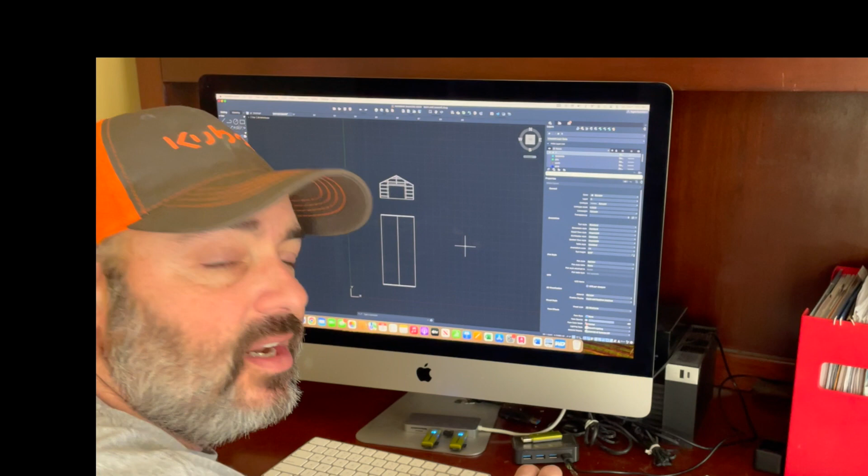I got several things going all at once, but this one has taken a bunch of my time, just going back and forth, making sure I've got everything how I want it. This is the barn project, and if you watched one of the last videos...

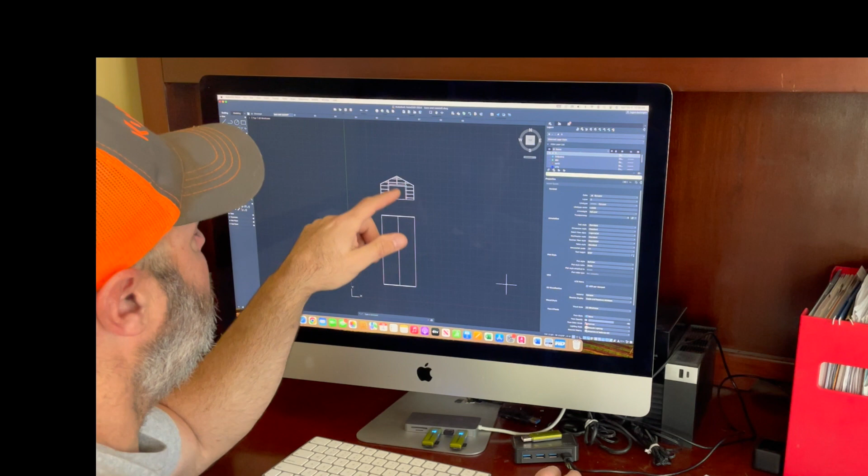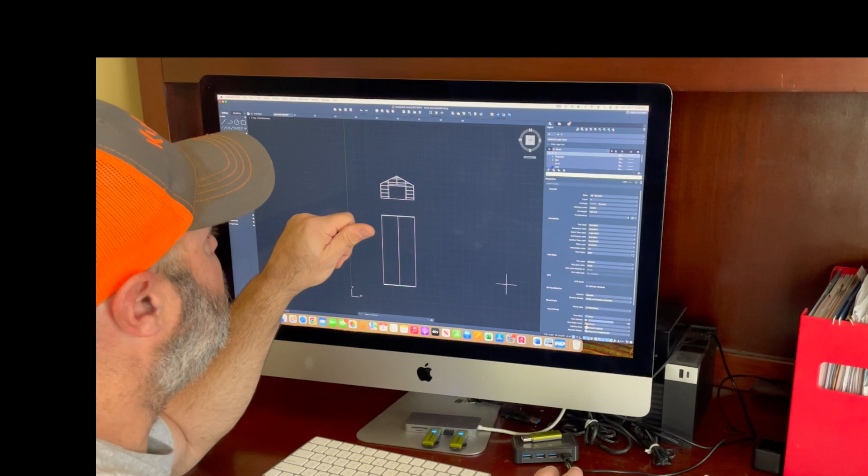This is the plan view, looking down from the top, and this is the very front of it, looking from the front. If you watched the last video, might have been two videos ago, I can't remember, but I moved the sawmill. The sawmill was in here, and this framing is all planned, not in place right now, but the sawmill was sitting in here, and I wanted to open this up for some storage and to use it for what it's intended for.

I just put the sawmill in there temporarily. So this is my plan moving forward, and I can bring these layers on and show you kind of what it's going to look like.

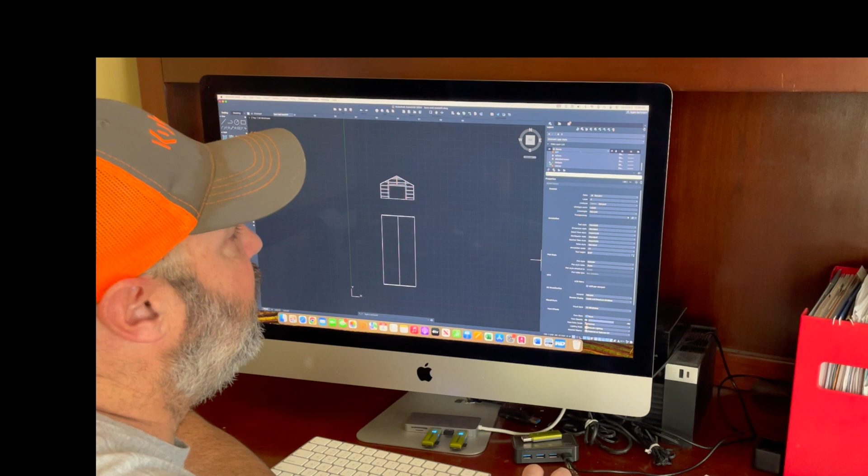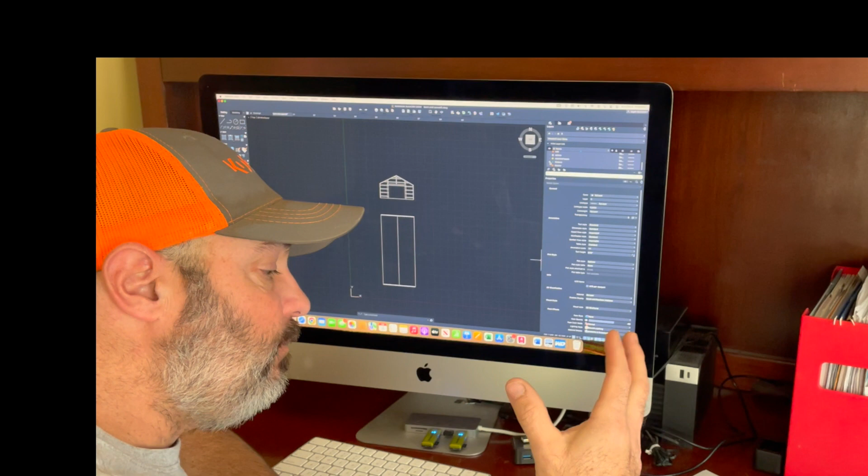I've got all the dimensions and everything, so I've done little engineering calculations. I'm not going to bore you with all that, but I did some of those to figure out the height of the LVL beams that I'll need to span 25 feet. So I had to calculate the total weight of the roof plus the snow load, and figure out the length of the span to get the height of the beam that I'm going to need. So basically a lot of stuff went into it.

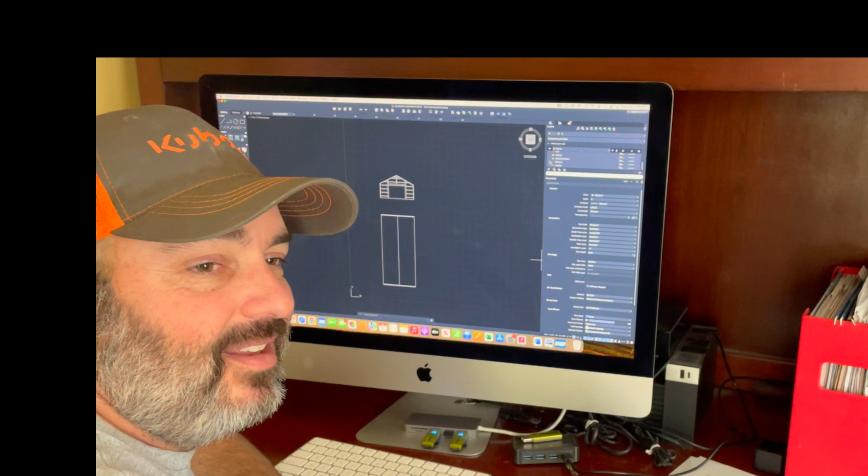There's some other YouTube videos that go into detail on that, but I kind of had to cheat and watch some of those, and once I got into it and got started, it kind of brought back my engineering training from the 90s. So it's been, I don't know, 25 plus years.

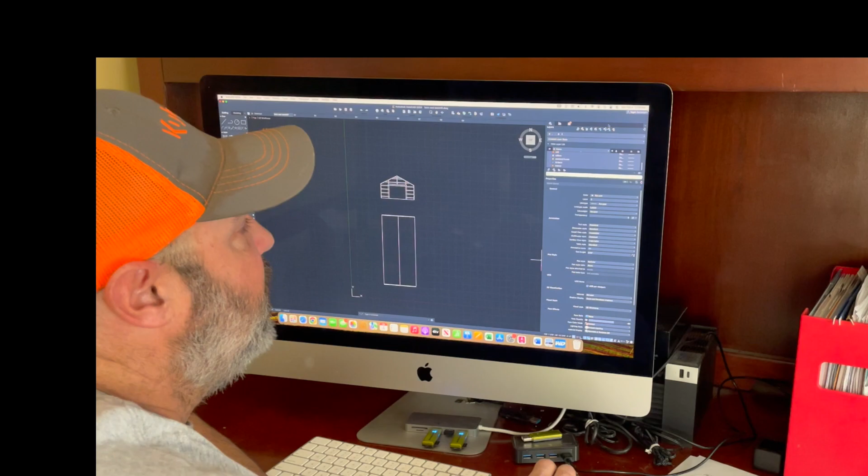So anyhow, let's bring these layers in and I'll show you kind of what it's going to look like. First thing we did, we came in here and we plopped in some, let me bring this in here. These are the timbers that are in the ground, the telephone poles. So this will make it look a little bit better. Okay, so right now we have these...

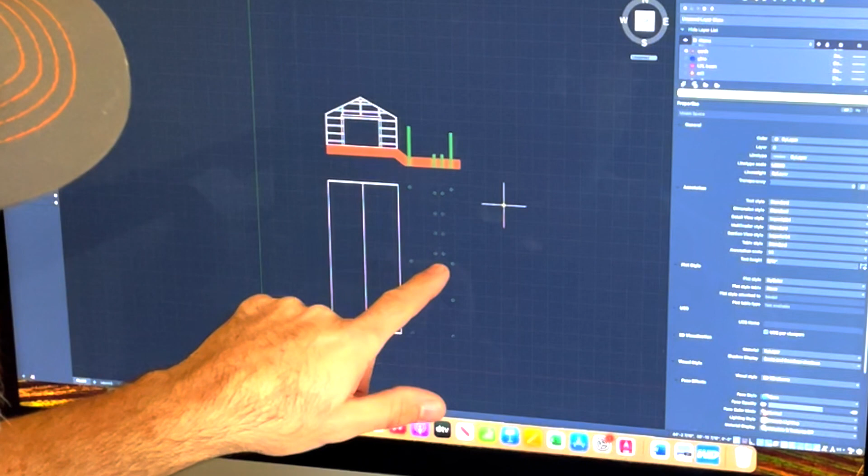...in with the sawmill sitting on it. So that's all these here. Again, this is the plan looking down from top, and there's the sawmill sitting in there like that. This is as built, so this is real dimensions. I've got elevations and everything that are proper on here.

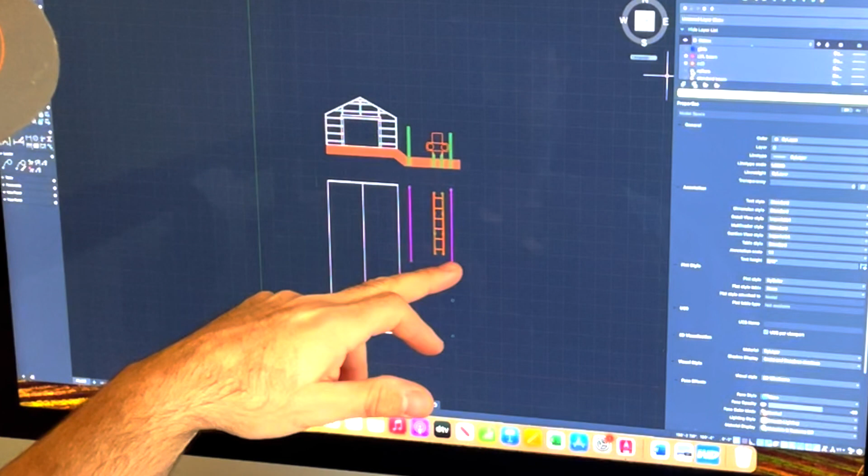So the next thing we are going to put in here are our LVL beams, which are the 25-foot span. Those go right there. I'm going to put one here and one here. A lot of people are going to ask, well, why don't you just span from here back to the building? And I could do that if I wanted to cut some 20-plus foot long pieces.

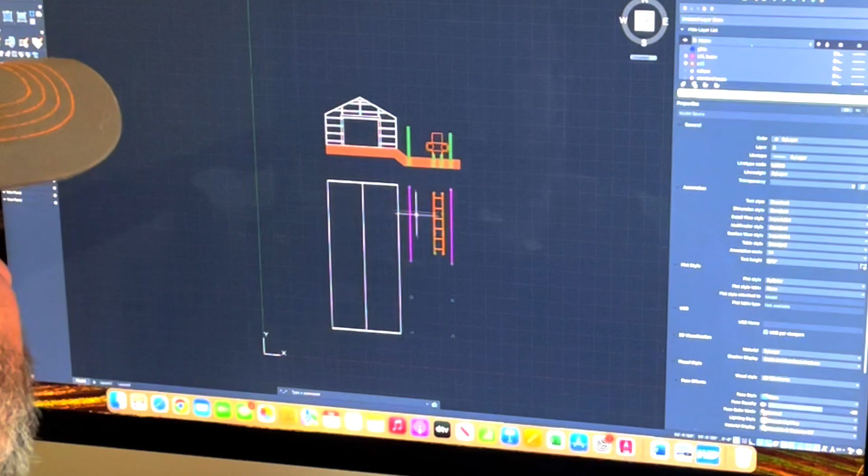But I put this sawmill out here intentionally so that I could drive my tractor in between here. My tractor has a stance of about 6 feet wide, so I had to take that into account. In doing that, I'm going to have a pretty good span here, and I'll bring the dimensions in a minute and we'll see exactly what it is.

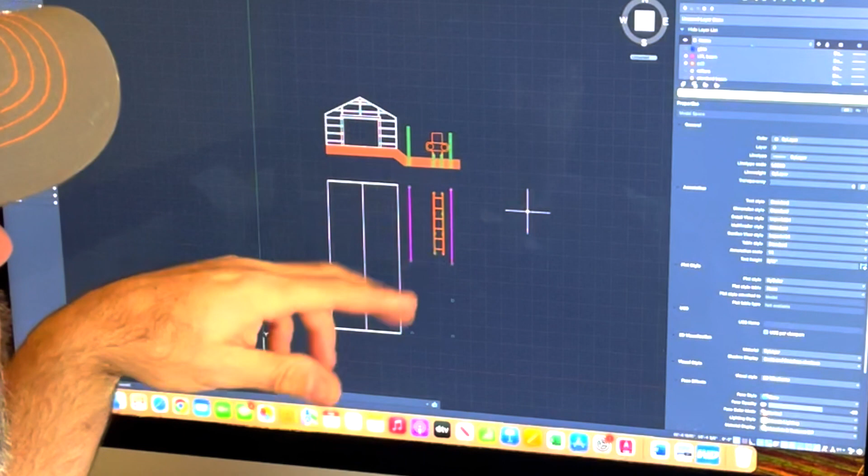Yeah, so I'll be able to drive my tractor through here and get all the sawdust out. And the next question a lot of people are probably going to wonder is, well, why don't you just throw the sawdust outside? And I could do that, but the way this sawmill is set up, the stops are on this side over here on the left side. So when you load your logs, you want to load them against the stop so they don't roll off. And the way it is, it's going to shoot the sawdust into here.

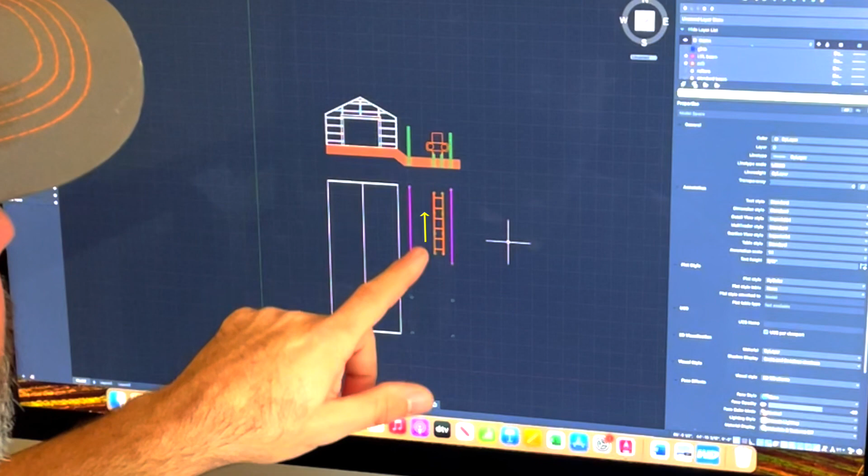So the travel of the mill is going to be this way, shooting the sawdust towards the building, which is not a big deal because I made it wide enough where I can bring my tractor through with the front bucket or the box blade and just scoop it all out in one shot and be done with it.

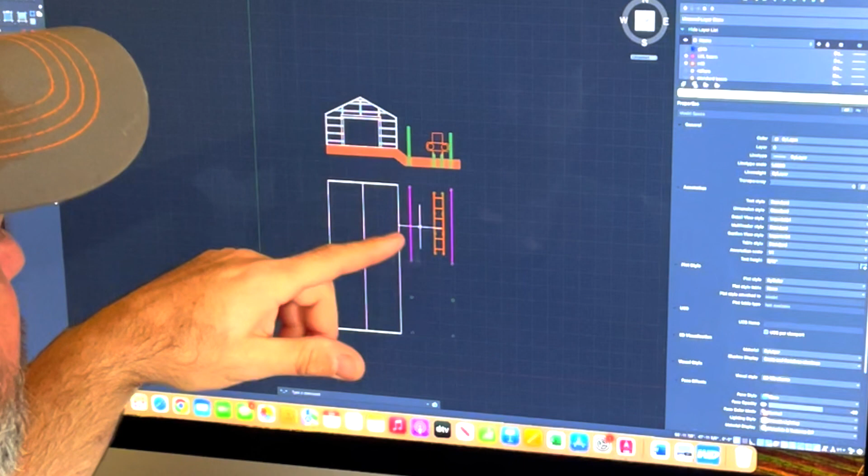I could have turned it around, but then I would have had to makeshift some stops for the other side, and I didn't want to get into all that. It's not a big deal. I wanted it wide enough so I could store some stuff in there, so I could turn around and put lumber, take lumber off the mill and put it over here on sawhorses if I needed to. So I kind of wanted it that wide. So anyway, with that being said, I'm...

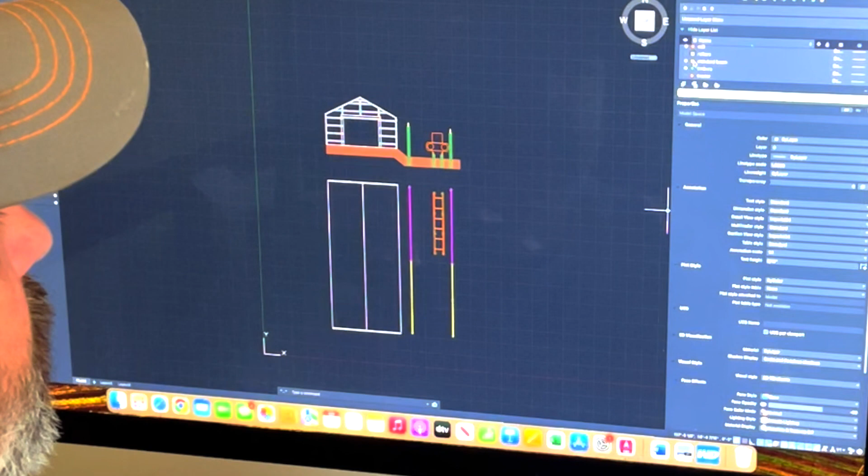showing the other beams too. This is going to be future, this yellow. And I'm just going to do these. I don't need to span the 25 foot. So those are like half of that dimension.

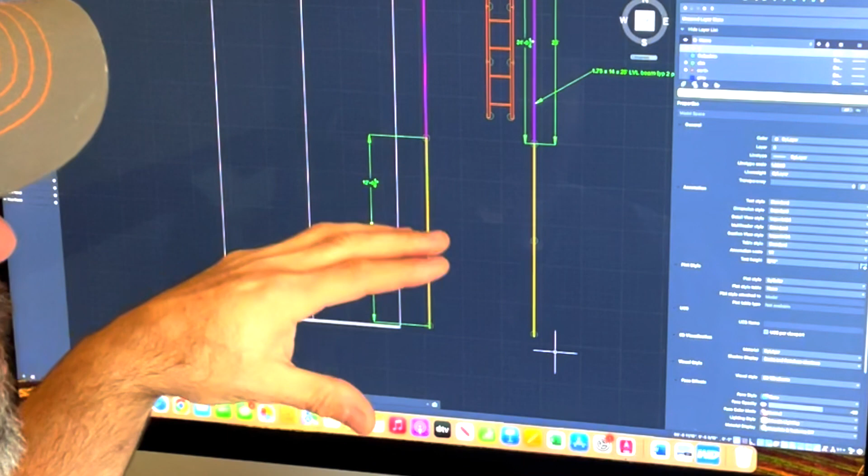So let's see here. So yeah, so down here, this is all future. My plan for this is to eventually enclose this and maybe have a workshop in there. But I want to leave it open for a while and see if it's going to help me with my sawmill operation. I may need this area to stockpile lumber. So I'm just going to leave it open for now. But this is going to be phase 2 anyways.

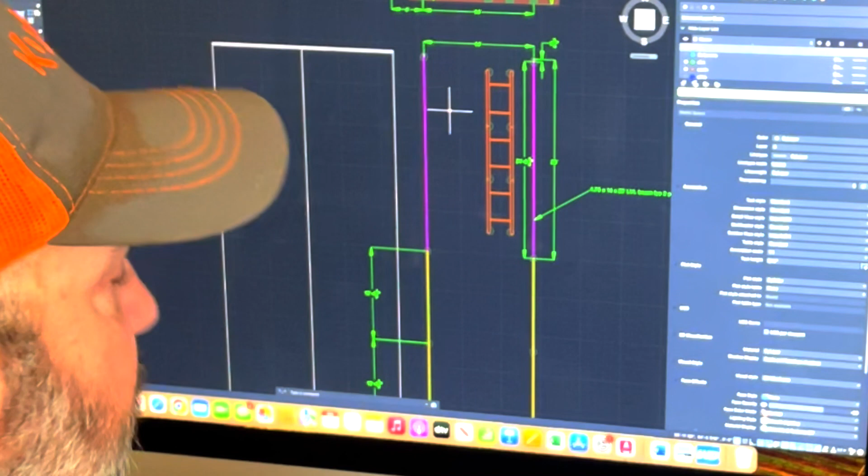So what I'm working on right now is just basically this piece right here, this in the pink here. So I got my 2 LVL beams. They're going to be 14 inches deep, and they are going to be 1 3/4 wide, and they're going to span 25 feet. And I think they make them in 22, 24, and 26.

So I'll just have to get a 26 and cut it down a foot. That'll be okay. 25 feet works good with a 50-foot building. So that's what I'm going to do there.

And then this row right here is going to be 4 feet off the building, which I'm not going to really lose a whole lot there anyway because it slopes down right here. So that'll give me plenty of room to drive my tractor all through here to get the sawdust out or whatever I need to do.

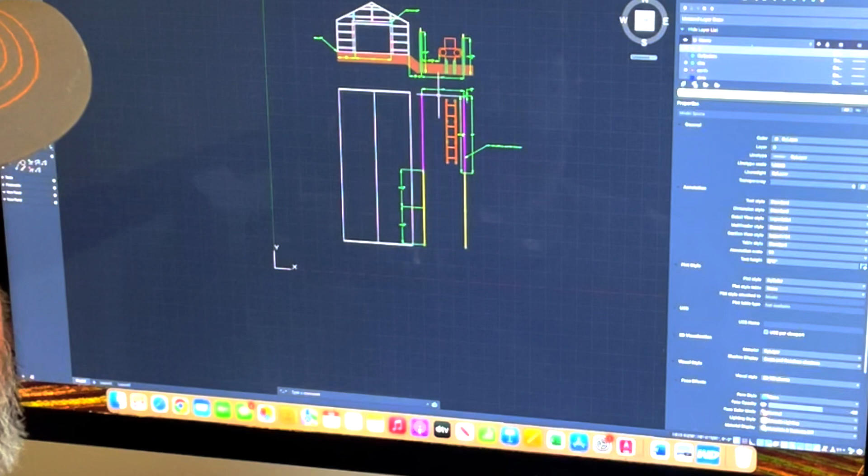So yeah, that's where we're at right now. If I go ahead and put the rafters on this thing, I've got the rafter spacing, 16 inches on center.

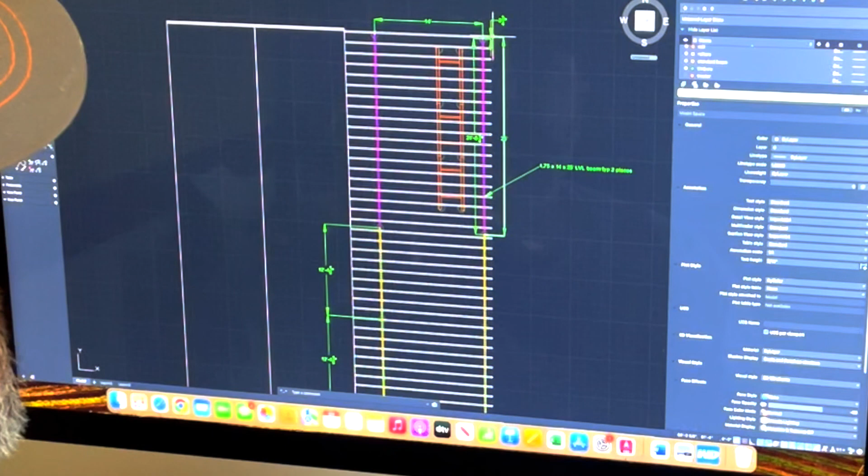This one here is going to be a 16 footer. It's 14 feet from column to column and a 2 foot overhang. And then you're going to just have a short piece, 4 foot piece here back to the building. It'll be a little more than 4 because it's a little bit of a diagonal. You can see it here better.

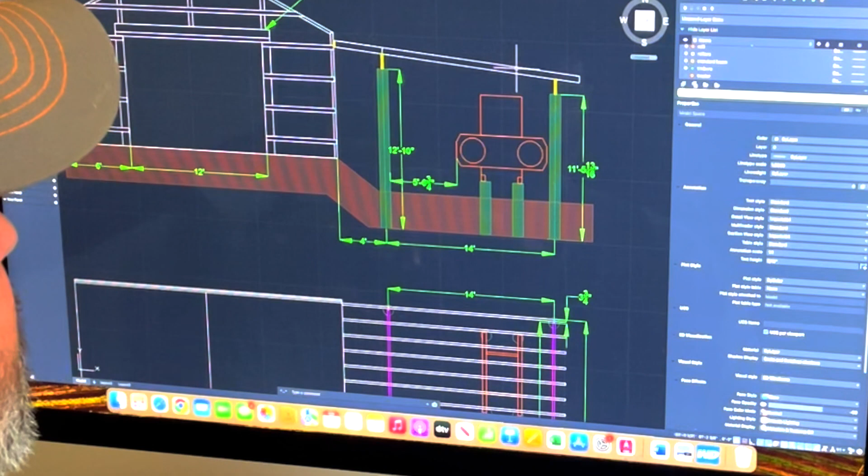So that board here is going to be 16 feet. I'm going to cut these. These are 2x6s. I'm going to cut these on the sawmill. I'm going to basically cut everything on the sawmill except for the supporting structure here, this right here, and these 2 LVL beams.

Everything else is going to get cut on the sawmill, and then I'm going to metal roof it. So that's where we're at there. Going to run 1x4s across this way to catch my tin. That's going to look like this.

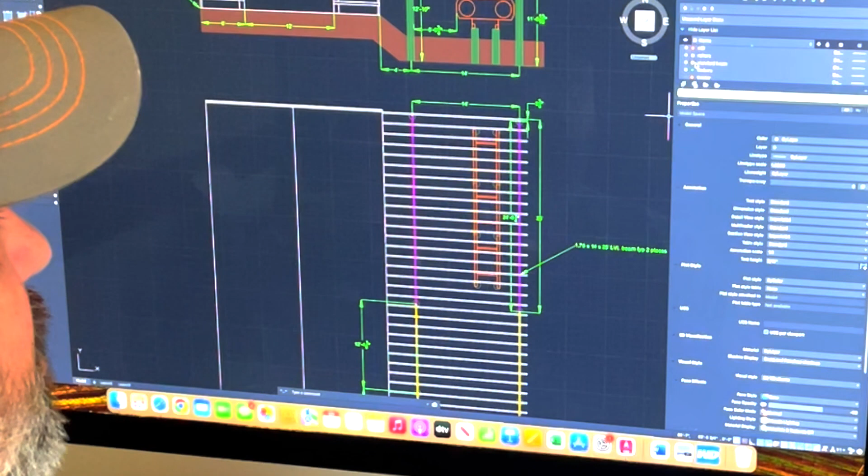So these are all going to be 1x4s. This is going to be what's holding—I didn't do it in a section view, but I should have. Anyway, they're going to be sitting on the 1x4s, which are going to be sitting on top of this, running lengthwise every 3 feet, and then my metal roofing will go over that.

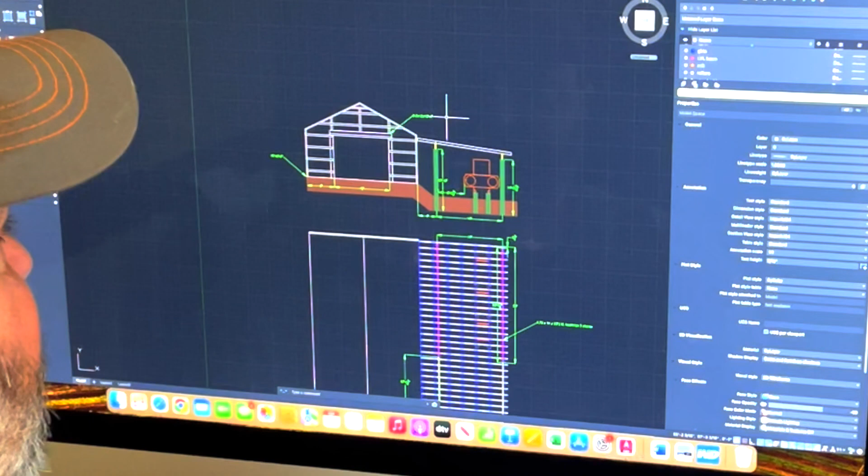So I guess I had a little bit to finish the drawing, but I really don't need to do any more. I just had to do it to get good dimensions so I know what I'm building out there. It's a whole lot easier to do it like this than to stand out there and look at it.

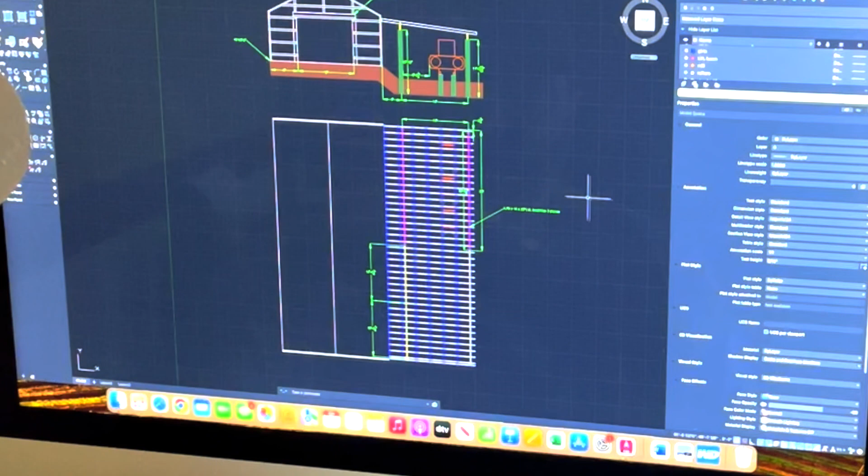This has actually been in the works for, goodness, probably I don't know, a couple months anyways, just on and off, back and forth, doing dimensions, trying to figure out, is this going to work? Is it not going to work?

Originally, I was going to go with a 20-foot beam, and then I wasn't going to have enough room in between the sawmill, in this column here, because that put it like up in here, and I didn't want to do that. I just want to do it right the first time and not have to worry about it.

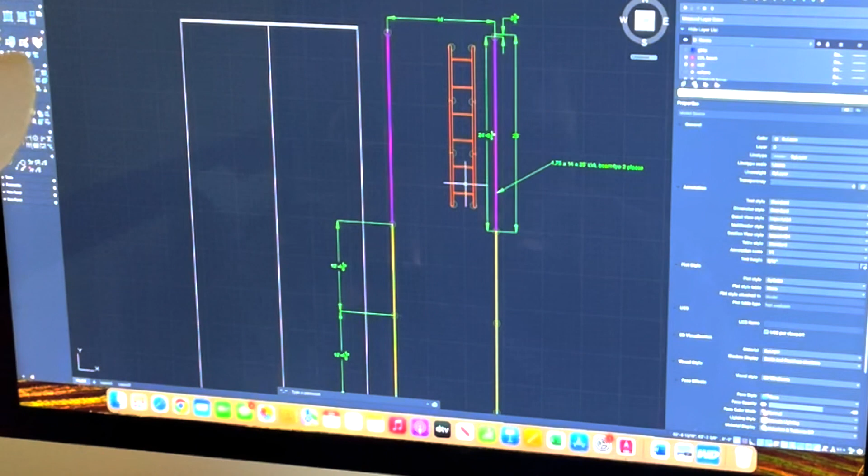Also, in the future, if I ever decided to upgrade this sawmill, which I don't have any plans of doing, this area is big enough I could put an LT70 in there if I wanted to, but I don't have plans of that. I like this mill, it's simple. I'm not a production guy, so I'm not going to be cutting a ton of wood. Most of it's going to be for my own use.

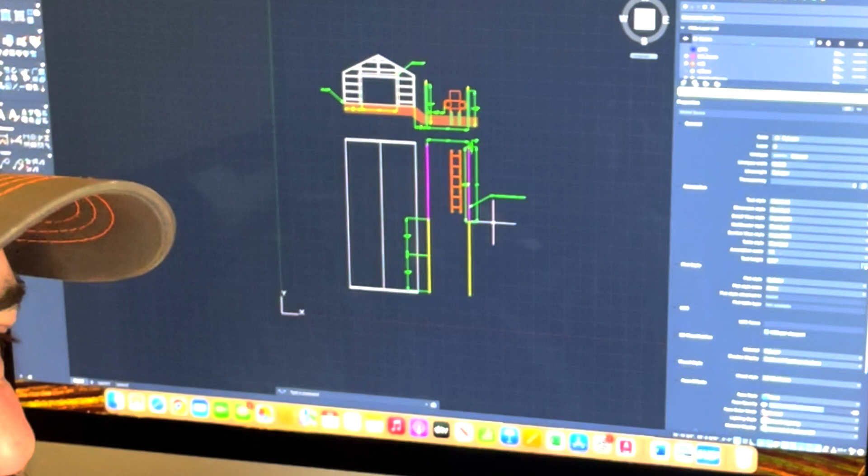That's basically what I've been working on. I'm redoing the dump trailer, which I'll have a video on coming out pretty soon. I'm just putting some primer and getting some paint on it now. It's been a couple hours a day, every day for the last couple weeks, just doing a little bit at a time. It's not something that really had to be done, but it's something I wanted to do. I wanted to put sideboards on it, so I had to build some brackets. You'll see all that in the next video I release after this one.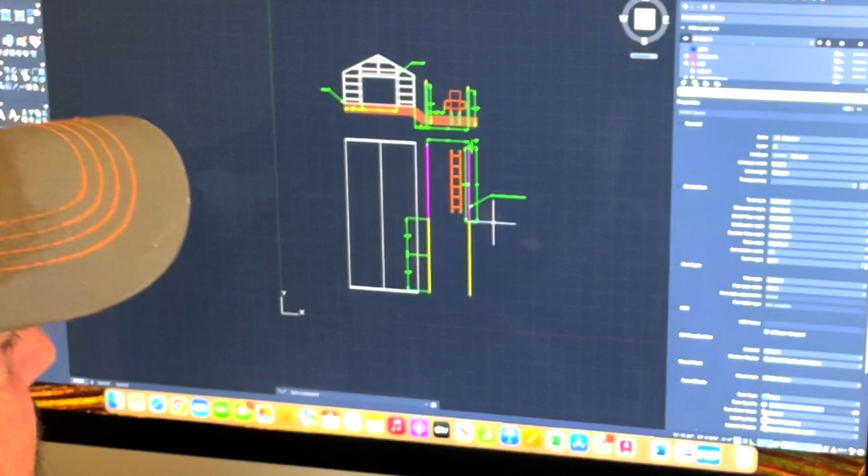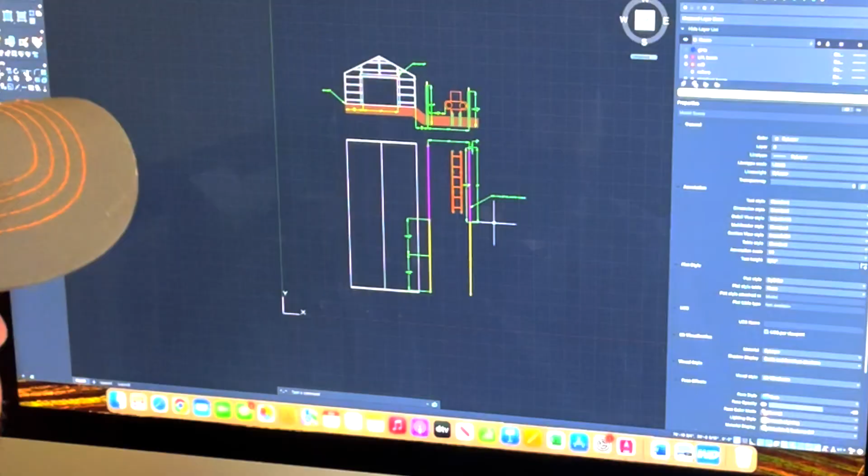I did get hired for an equipment operator position for a good friend of mine, and that starts a week from tomorrow. So there's going to be a learning curve with getting up to speed with that business, getting my CDL, and all that kind of thing. Hopefully I can keep going with this. It may slow down a little bit, but I do have some other really good things coming for this channel. One of them might involve an old tractor rebuild.

Yeah, I'm hoping that will come to fruition. So anyhow, I hope you guys enjoyed this. I can show you a couple other little things I was working on. That's an old version of it.

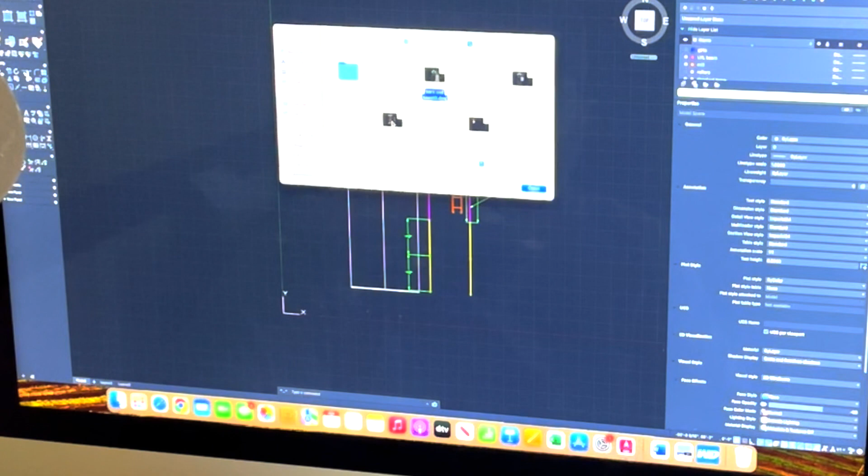This is kind of the house that we were working on at one point. I don't know if this is our latest one or not, I can't remember now. But anyway, this is what I've been working on for the house design. That is going to happen someday, might be 2 years from now, but it's going to be a slab-on-grade home, kind of like a barndominium style deal.

And it'll have a small loft upstairs, kind of overlooking down into the living area. That's kind of where we're at right now with the house drawing.

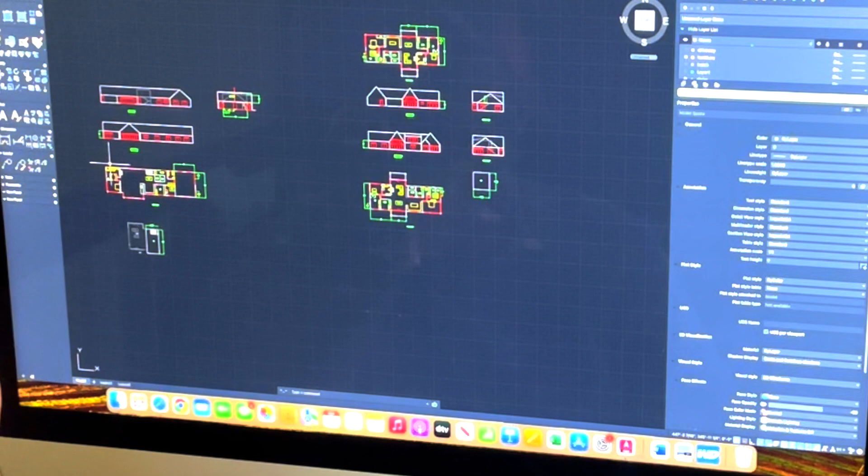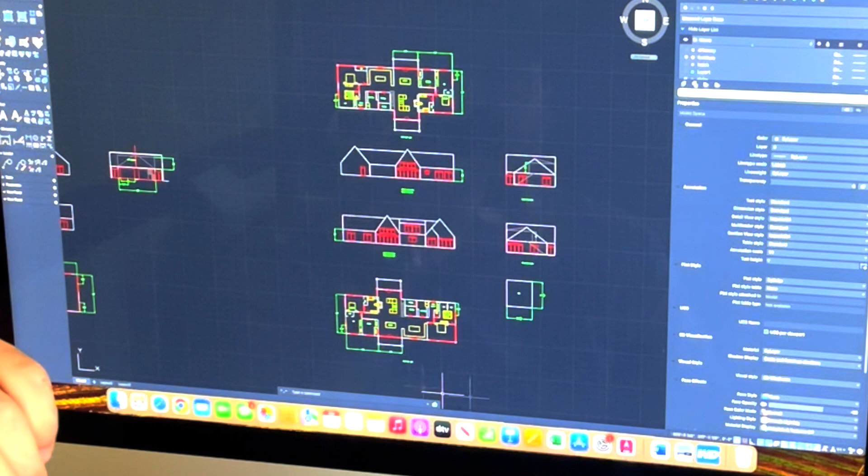We've done several of these different takes here. This was a different revision, I think revision 80. But yeah, this is kind of the one - I don't know how good y'all can see that, but this is the one we're going with right now. This is kind of the latest design.

It lends itself to single floor living, and we're not getting any younger, so that will be much appreciated, I think. And it has a nice guest room, a separate art room for my wife, laundry, pantry, mudroom - the whole 9 yards.

So that's the latest where we're at with the house. Maybe we'll build something that looks something like that, and maybe we won't, I don't know. We've revised this thing a ton of times.

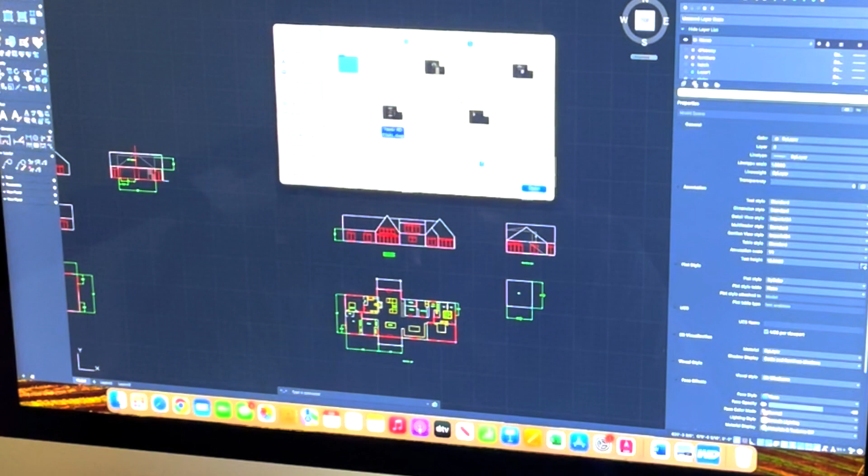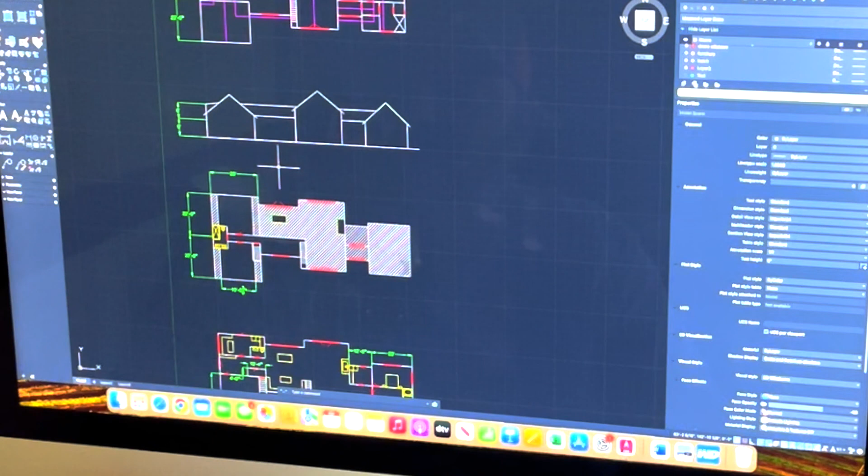Let's see what else I got here to show. Let's see what this one is. Okay, so this is another house drawing we were kind of thinking about - this was an earlier rendition. I do all this so that I can try to get the ceiling heights right, and make sure that what we give the builder is well prepared. We want to do our work up front so that when we give it to the builder and he gives it to his draftsman, we already know more about it than they do, so it's kind of where we want to be. But that was one of the earlier revisions.

I got a pile of these in here. I'm not going to bore you with all of them, but in my downtime and rainy days, when I'm not editing videos, this is what I'm usually working on. So anyhow, I just wanted to bring you guys along. I told you I'd bring you in the office one day and show you some of this AutoCAD stuff.

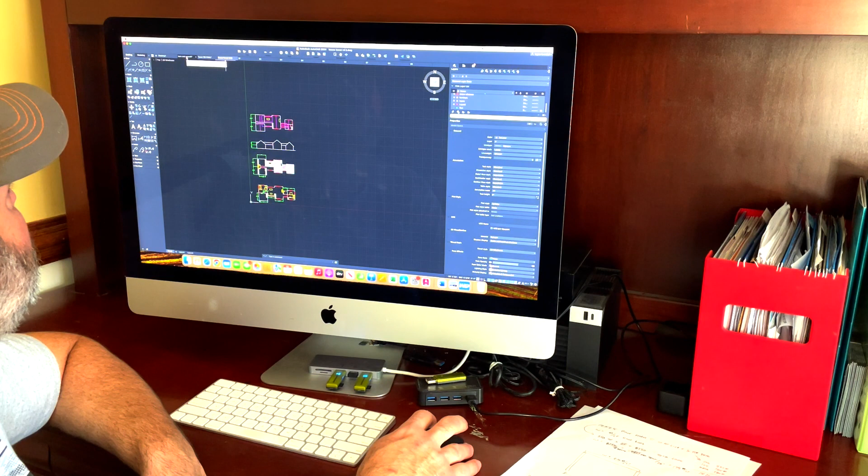It's something I haven't done in many years, but it's like riding a bike - you get back on it and you can pick up on it pretty quick. So that's where we're at. I'm going to try and get some of this built this week. I've got a little bit of the layout done on it right now, and I'm probably going to pick up these two beams this week. They have them in stock right here in town, so that's a good thing.

And in order to get my 16 footers, I'm going to need to cut a couple trees down. So you might see a little small scale logging operation going on too.